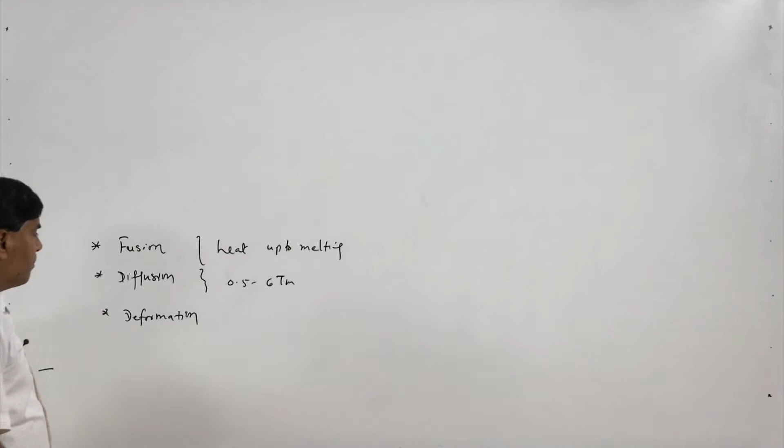So we know that for fusion we have to heat up to melting point, while the diffusion takes place in the range of 0.5 to 0.6 times the melting point in Kelvin. While the deformation based approach is where either heating is limited or it is very negligible.

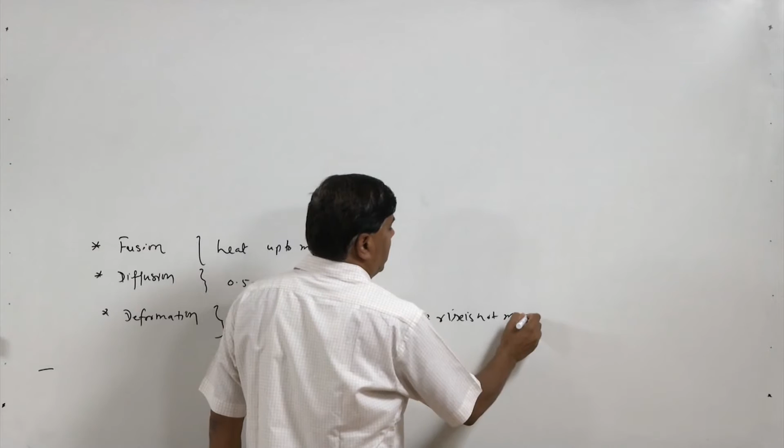So the heat is limited and temperature rise mostly is not much, but in some cases like friction stir welding and friction welding of steels, the temperature can go as high as 700, 800, even 1000 degrees centigrade. Under those conditions we may require protection to avoid the interaction of the metal with the atmospheric gases.

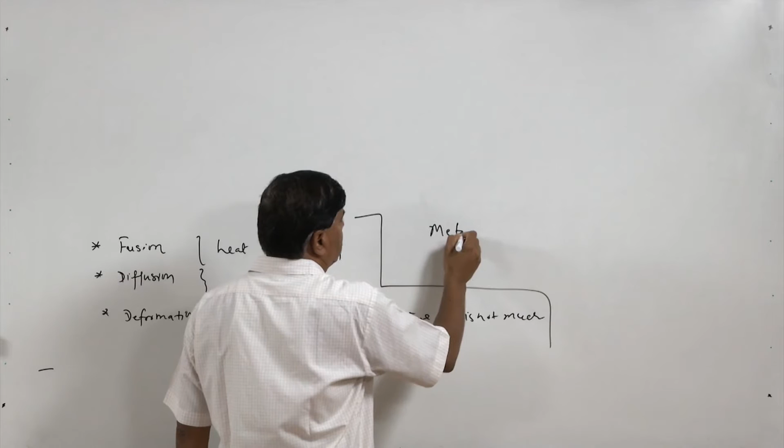We know that in all these cases the metals, when they are heated, all metals show affinity with the atmospheric gases. These gases are like nitrogen, hydrogen and oxygen. So increased activity and affinity of the metals at high temperature becomes problematic.

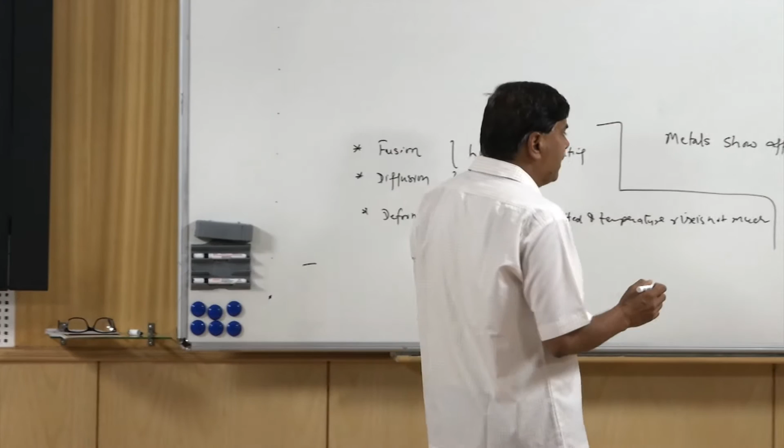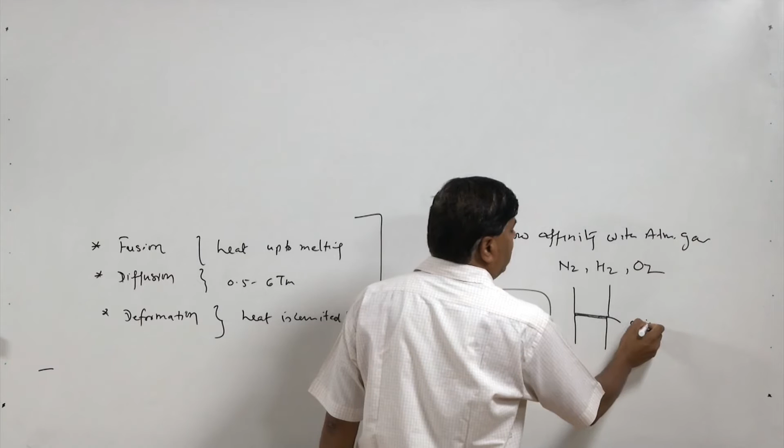Especially when fusion is achieved for development of the joint or diffusion is required across the interface of the components to be joined, because formation of any layer at the interacting surfaces, say in case of diffusion, if any layer of oxides or nitrides is formed, then it will hinder the diffusion across the interface and act as a barrier for development of the joint. So it is not good, we need to protect the joining process during diffusion by using either inert gases or vacuum.

And in case of deformation, normally if the temperature rise is not much, then separate protection of the metal from atmospheric gases is not required. But if the temperature rise is too much and the metal is sensitive, then of course we require protection from the atmospheric gases even in deformation based joining approaches.

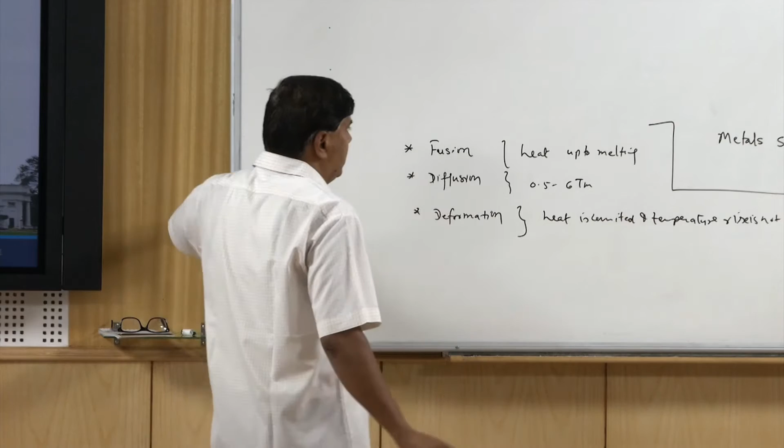So now we will focus mainly on two aspects here, diffusion and fusion, because the problem of interactions of atmospheric gases with the solid state process is not that much, unless very specialized metal systems are welded, like titanium alloys, which may require protection.

So here when we talk about fusion, because of the change in state from solid to liquid, these gases from atmosphere like nitrogen, oxygen and hydrogen are the main problematic gases as far as fusion welding is concerned. And these gases, whenever the components to be joined are brought to the molten state, interact with the molten metal in two ways.

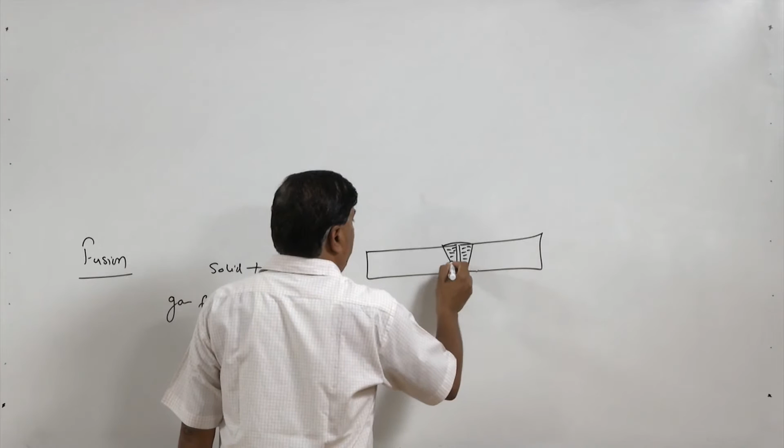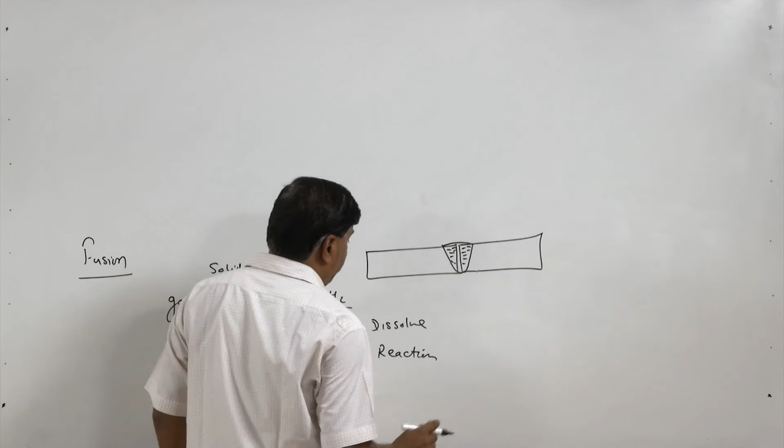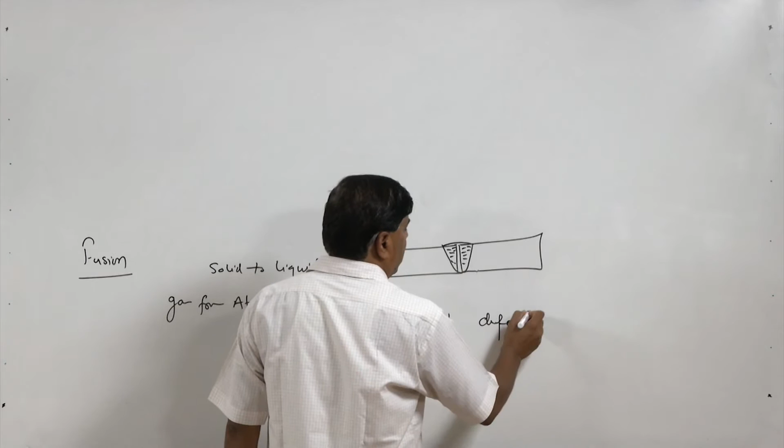One, either these gases will get dissolved because of the high solubility at elevated temperature in the molten state, or they will react. So according to the way by which they interact with the molten metal, they will result in defects or discontinuities, which may lead to rejection of the weld joints when the discontinuities are beyond the acceptable limits.

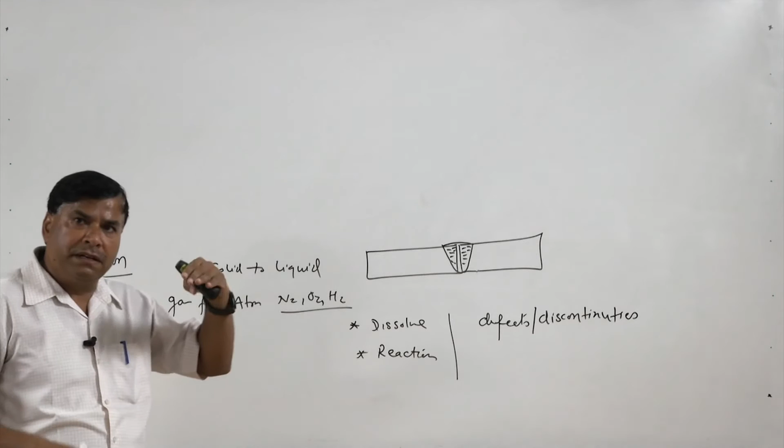So when the gases dissolve in larger quantity in the molten state, and during solidification if they do not get enough time, it results in the development of porosity.

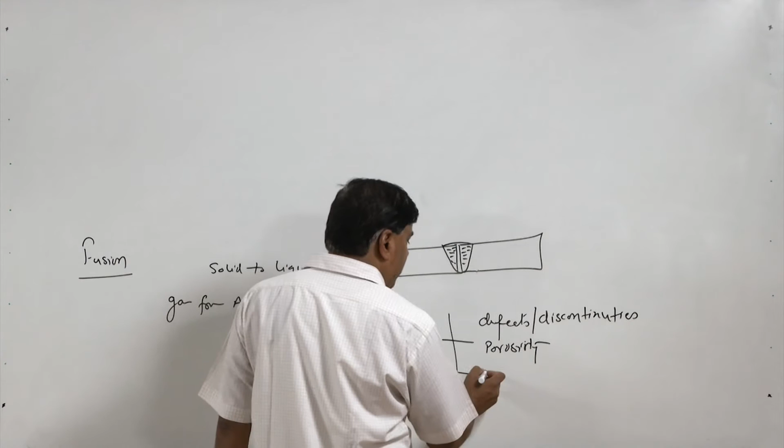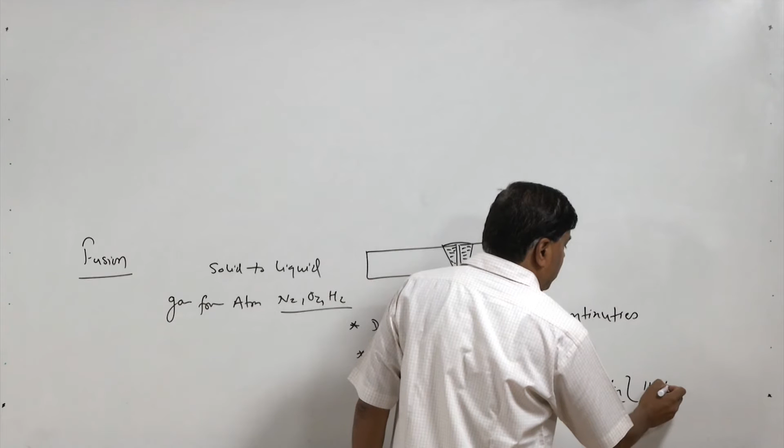And when the gases interact with the molten metal at high temperature, they will result in oxides, nitrides, hydrides. So these things, if they do not float over the surface, if they are not separated, then they will be present in the weld as inclusions.

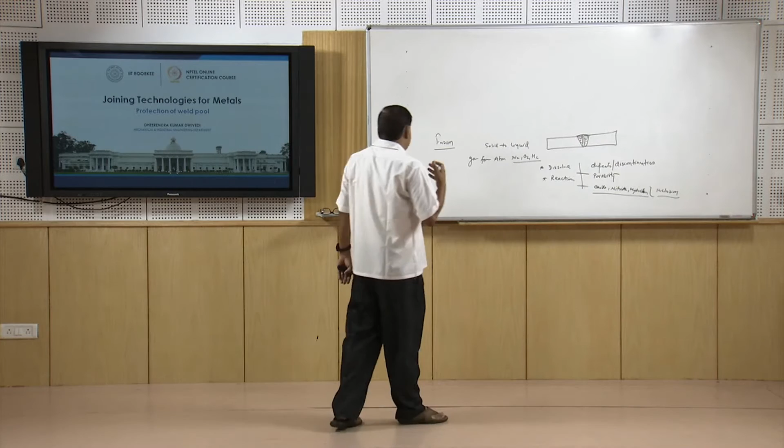So in both cases, the presence of porosities or inclusions in the weld will deteriorate the mechanical performance as well as other performance expected during service, like corrosion or ability to carry fatigue loads or tensile loads. Therefore, it is required that during fusion welding, the weld metal is protected using suitable approaches from the atmospheric gases.

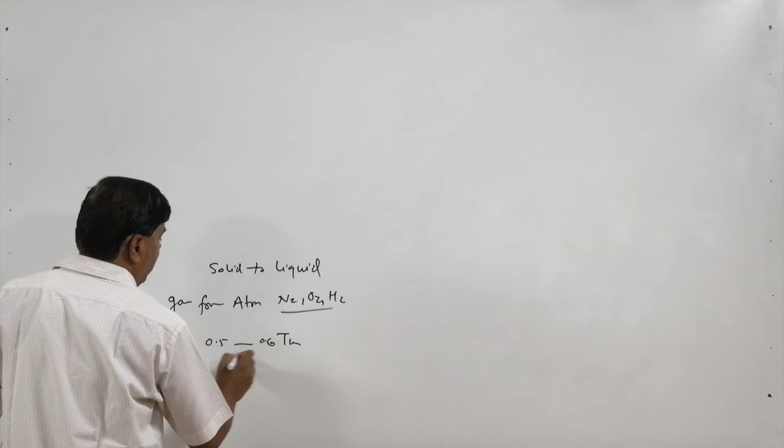And now another thing is about the diffusion. We know that if diffusion has to take place in the 0.5 to 0.6 times the melting point range, it is very much possible, if carried out in environmental or ambient conditions, this kind of heating will result in the formation of oxides and nitrides at the interacting surfaces.

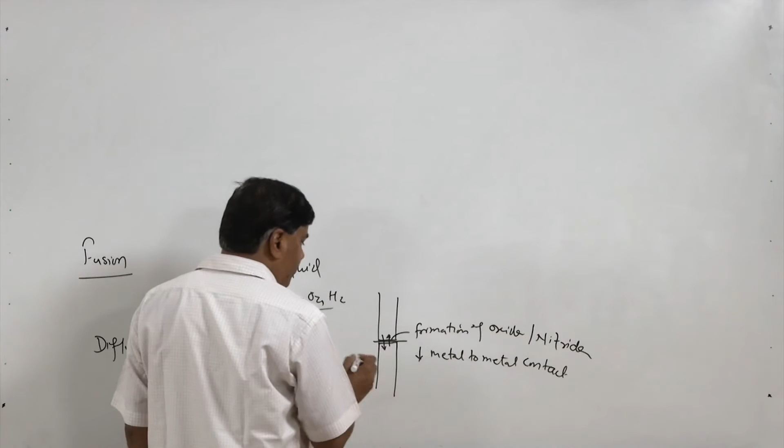So formation of these oxides and nitrides at the interface will reduce the metal to metal contact, and this hindrance will reduce the diffusion of atoms across the interface, which normally takes place for development of diffusion bonds. This is the prerequisite that across the interface diffusion has to take place, then only the bond will be developed.

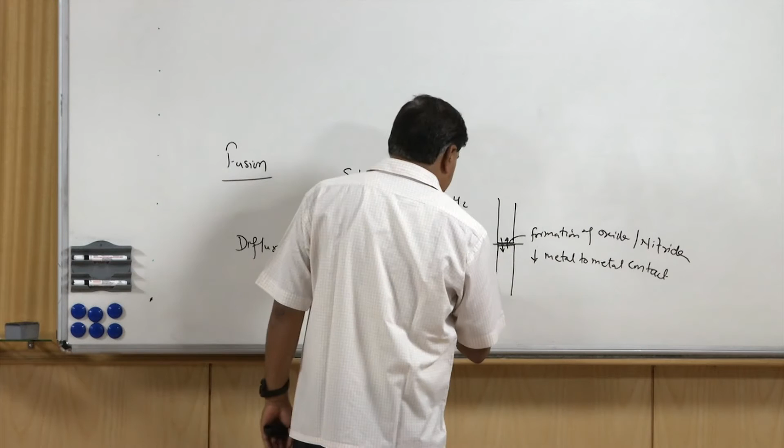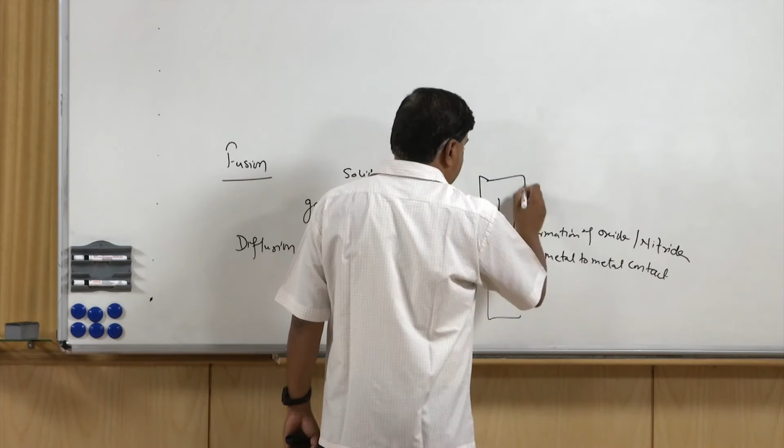The formation of oxides and nitrides due to heating at higher temperature is undesirable, and that is why it is necessary that the entire system for the diffusion bonding process must be protected. This protection is normally provided using two approaches. The most common one is the application of vacuum, ranging from 10 to the power minus 3 to 10 to the power minus 5 torr, which is very commonly used for the diffusion bonding process.

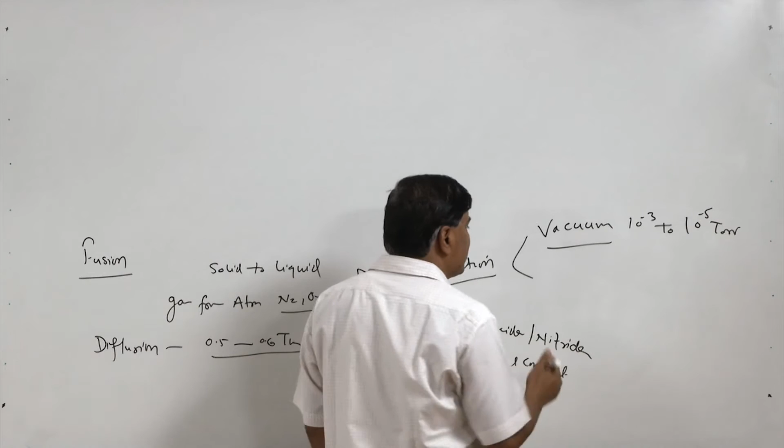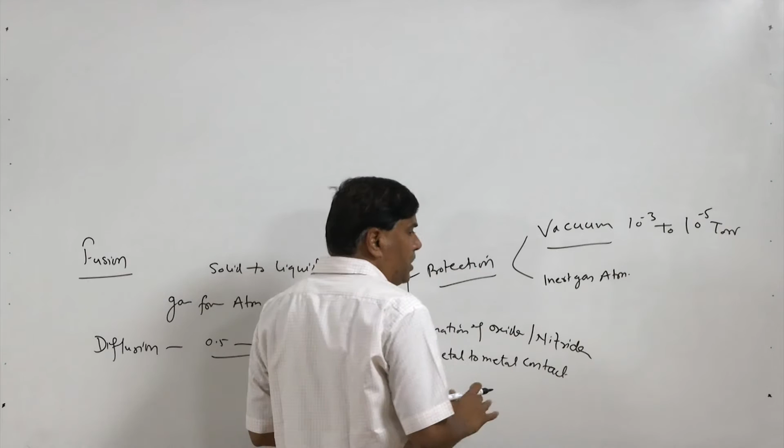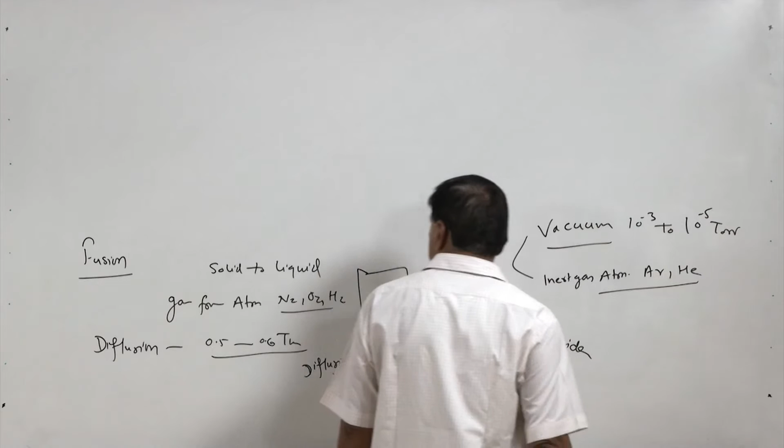On the other hand, if the metal is not that sensitive, then an inert gas atmosphere can also be created to avoid interactions of the faying surfaces during diffusion bonding, like formation of oxides and nitrides. For this purpose, argon and helium are the most commonly used gases to protect the faying surfaces from atmospheric interactions in diffusion bonding.

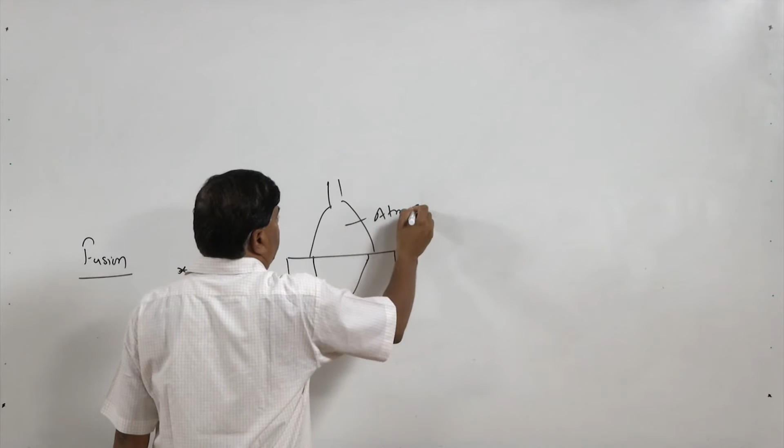Now we will see, if protection is not provided, what it leads to in respect of specific gases. If atmospheric gases are present in the fusion zone, or in the arc environment or whatever heat source is being used, these atmospheric gases get mixed up with the molten metal.

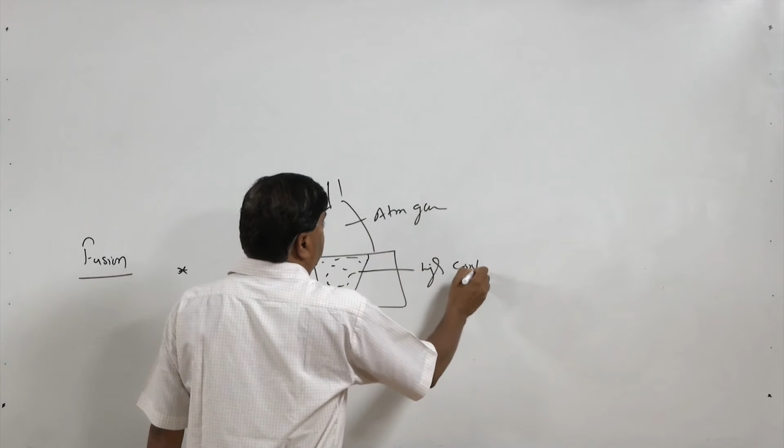High cooling rate of the molten metal sometimes causes entrapment of these gases in the weld. Such entrapment will appear in the form of big gas pockets. Another problem encountered is porosity, due to the difference in solubility of the gases in the liquid and solid state.

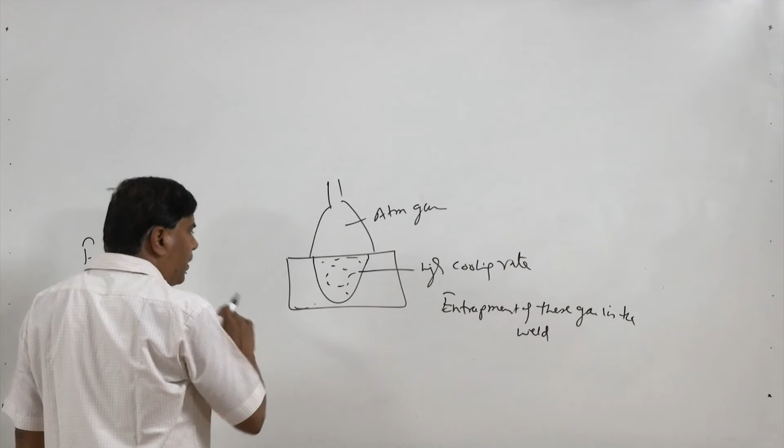When the gas is dissolved with the molten metal, or the gas is coming from the fusion of the metal in solid state, the gases which were already dissolved in the base metal - like the base metal already having a lot of oxygen and nitrogen content - after fusion these gases will automatically be present in the weld metal also. These gases must be taken care of, otherwise they can react in two ways.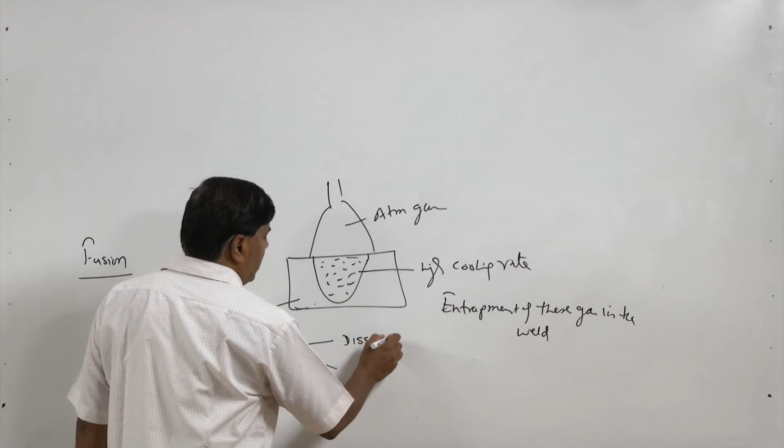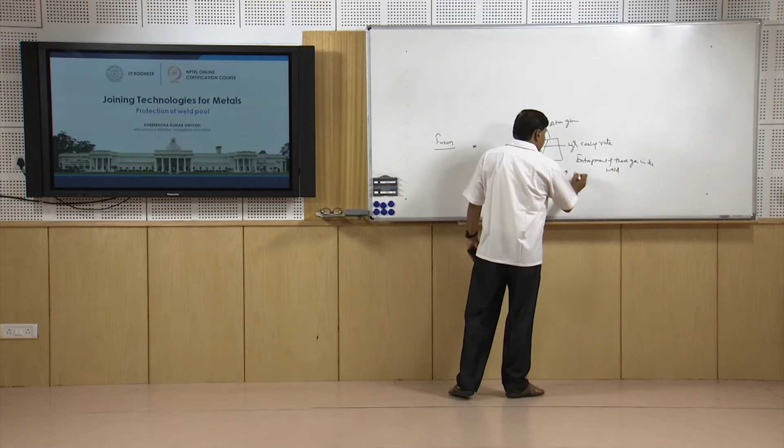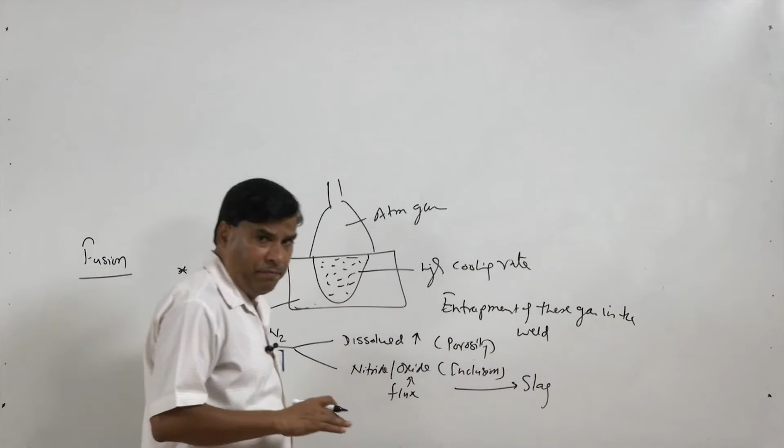The dissolved gases will tend to come out. If they are not able to come out up to the surface of the pool, then they will be present as porosity. Or if they react with the metal, they will form oxides and nitrides, which will be there as inclusions. So we need to take care of these oxides and nitrides using suitable fluxes. Fluxes react with the oxides and nitrides to form slag, and slag is designed to be lighter, so it floats over the surface of the weld pool and gets separated.

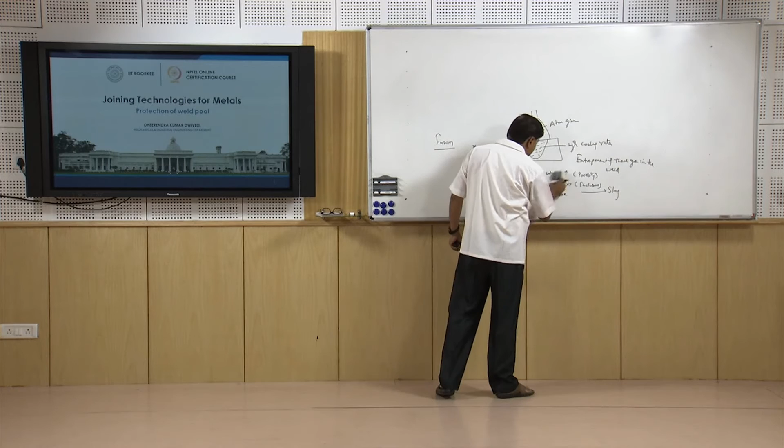Now we will see how specifically these gases affect the weld joint whenever present in larger quantity. Before going into that, from the welding point of view, we will try to see how the gaseous content in the weld metal is affected by the processes being used. We will see what approaches are available for protection of the weld. Basically, three approaches are normally used.

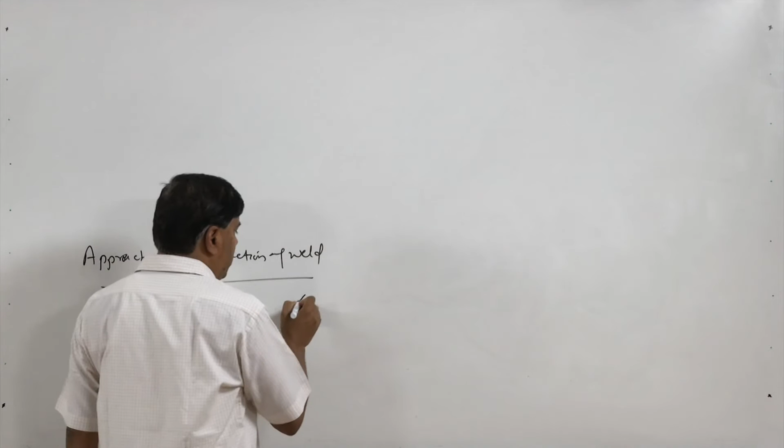One is forming a cover or shield of inert or inactive gases as per the metal. This kind of approach is used in processes like TIG welding, tungsten inert gas welding, and metal inert gas welding, like plasma arc welding, and shielded metal arc welding.

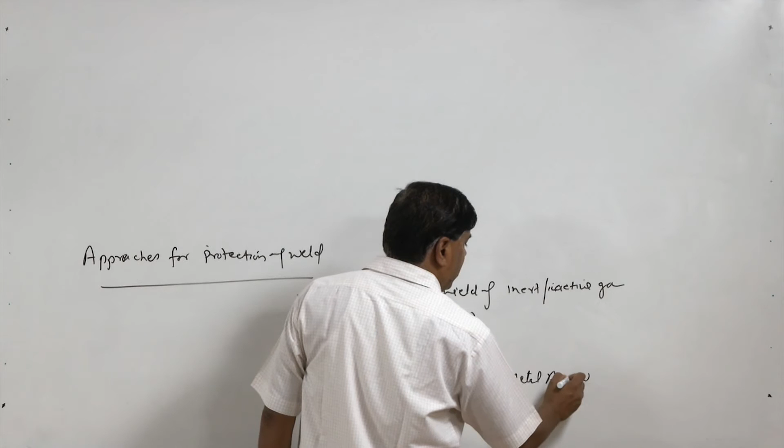These are the different processes - TIG invariably uses inert gas, while MIG can use both inert or inactive gases like carbon dioxide. Plasma also normally uses inert gases like argon and helium, and shielded metal arc welding uses flux coatings which produce CO2 and CO to protect the weld from atmospheric gases.

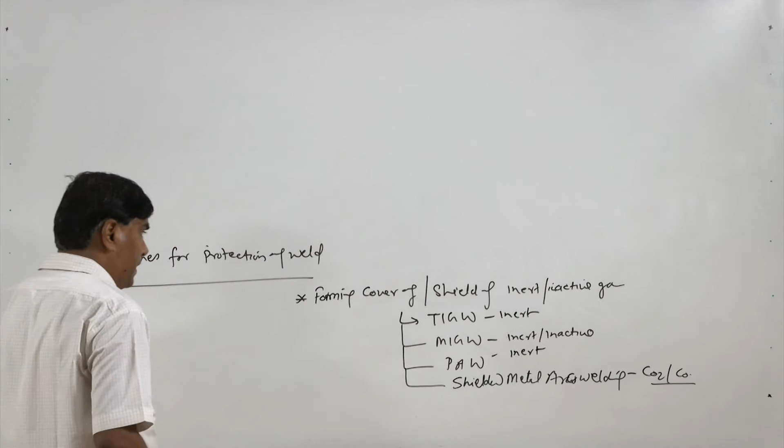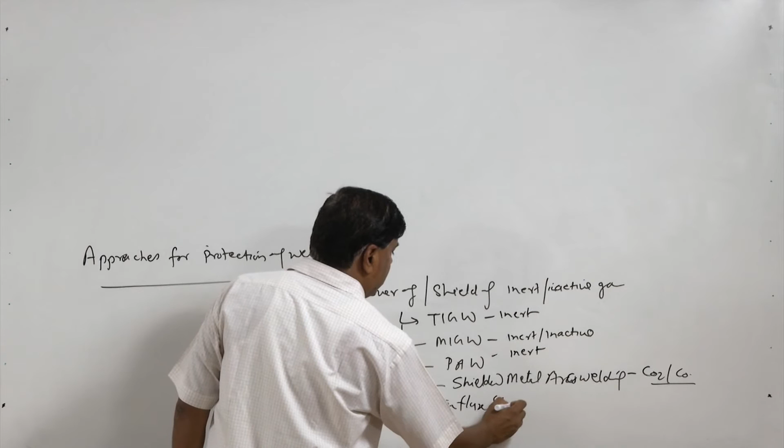Another approach is forming a cover of molten flux or slag. This is used in submerged arc welding, where the arc is completely covered with granular flux which is brought to the molten state in course of welding. So its interaction with the weld pool from atmospheric gases is prevented.

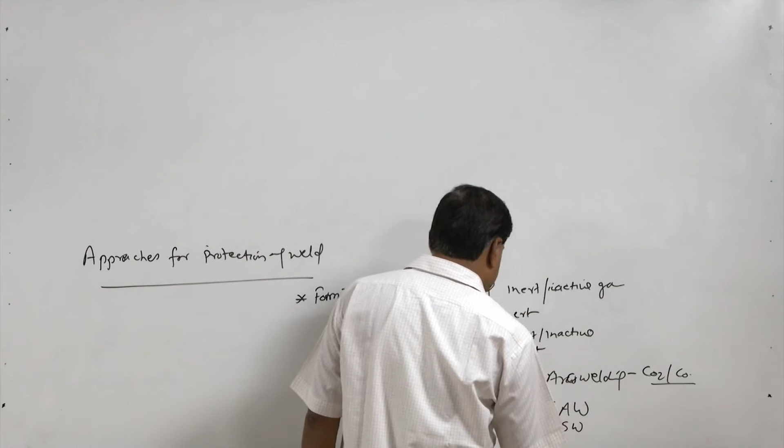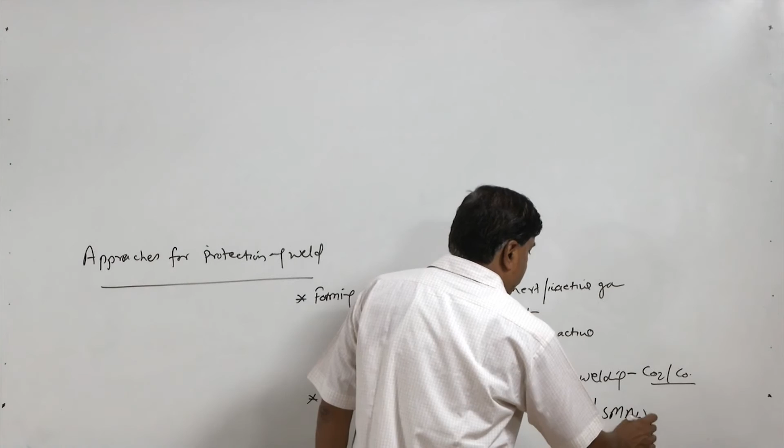The second is electroslag welding. In electroslag welding also, the molten flux and molten slag completely cover the molten metal, thereby providing protection to the weld pool. This principle is also used to some extent in shielded metal arc welding, because in shielded metal arc welding the fluxes react with impurities to form slag, and slag floats over the surface of the pool, separating the weld metal from atmospheric gases.

So it uses both forming a shield of inactive gases like CO, CO2, and covering the molten metal with molten slag in the shielded metal arc welding process. Both approaches are used in shielded metal arc welding. Now we will see the kind of vacuum used.

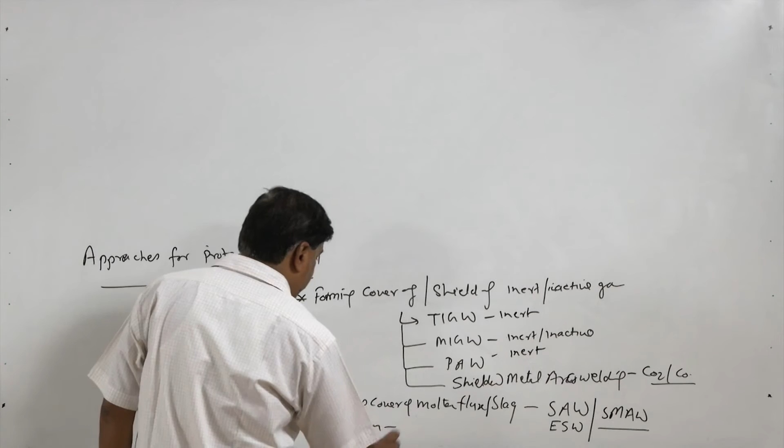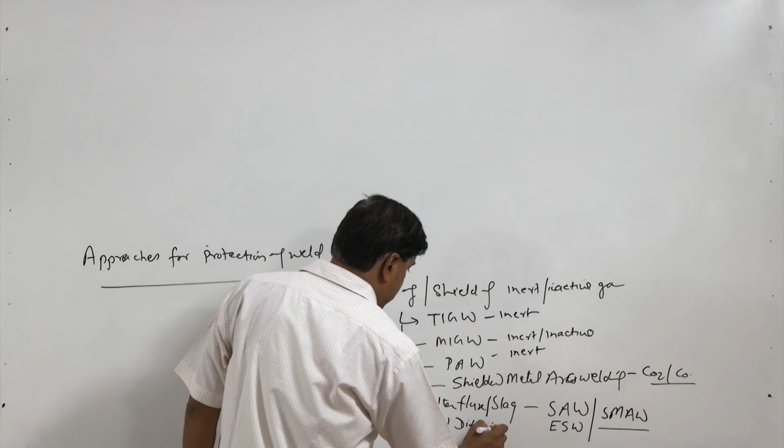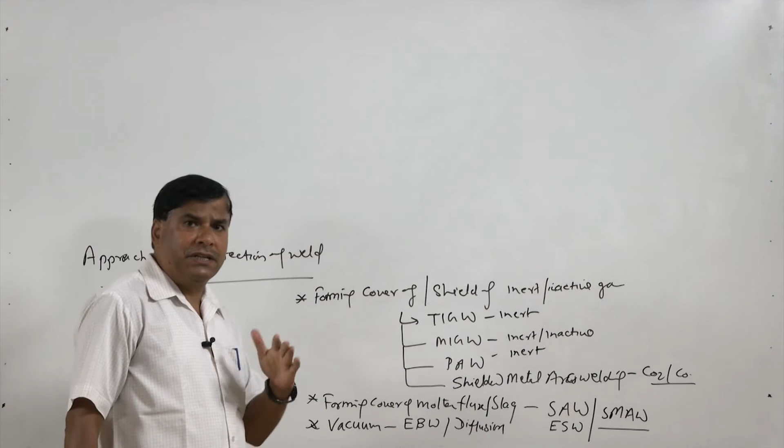Vacuum use for protection of the weld pool is also effectively used for protecting the weld joint, and this is used in case of electron beam welding. As I said, diffusion bonding also uses vacuum to avoid interactions of the atmospheric gases with the mating surfaces. Since the approaches are different and welding conditions differ while actually welding, the kind of protection available to the weld metal becomes different, and accordingly the quality of the weld is also found to be different.

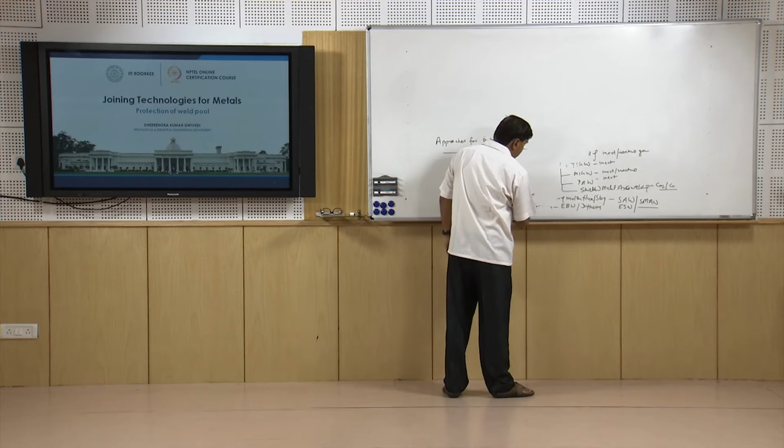That is what we will see generally observed: the gaseous content in the weld metal produced using the different welding processes. So this is what we will try to see from this diagram, which will highlight the kind of cleanliness with which the welds are produced by the different welding processes.

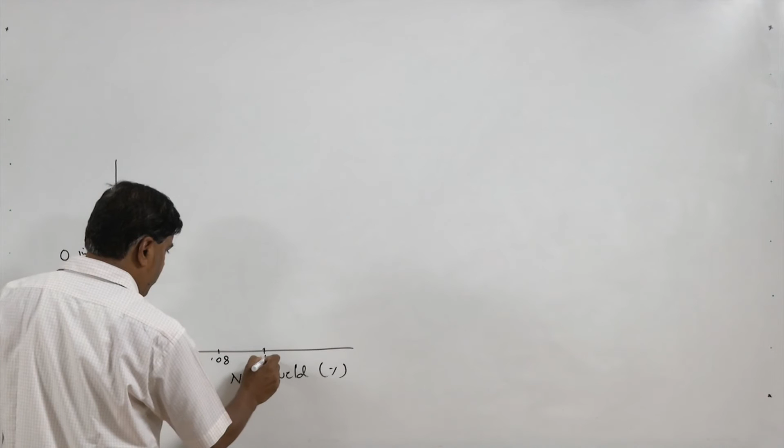On the x axis we will mention the percentage of nitrogen in the weld, and on the y axis we will mention the percentage of oxygen in the weld, in terms of percentage. So here, like say 0.04, 0.08, 0.12, 0.16 like this, and here 0.05, 0.1, 0.15, and 0.2.

So here we will see the very narrow band of oxygen and nitrogen. The weld produced using process A, like say TIG welding, which invariably uses inert gases, produces the cleanest weld, and thereafter we will have the MIG welding, MIG or GMAW.

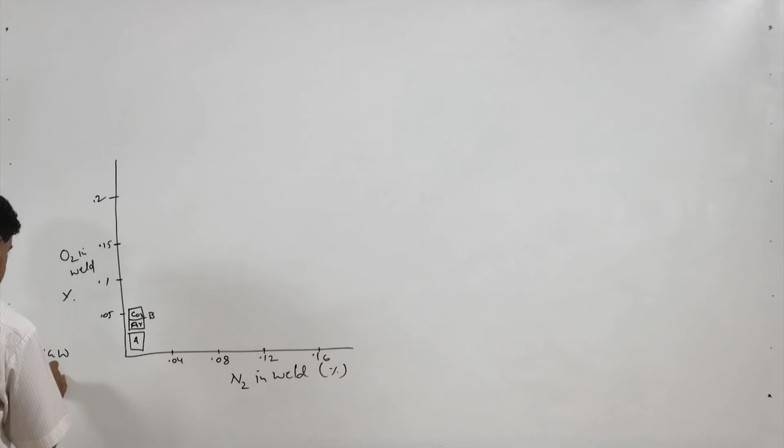It can use CO2 or argon; if argon is used, this is the lower band, and if CO2 is used, the higher band. So this second one, the joint made using process B, GMAW gas metal arc welding, using CO2 or argon, CO2 results in somewhat higher percentage of oxygen in the weld as compared to argon. From the cleanliness point of view, the cleanest weld is produced by GTAW and then GMAW. Then we will see submerged arc welding.

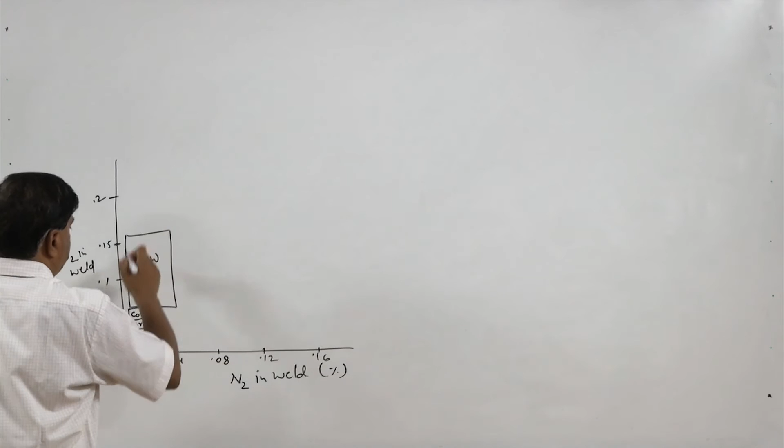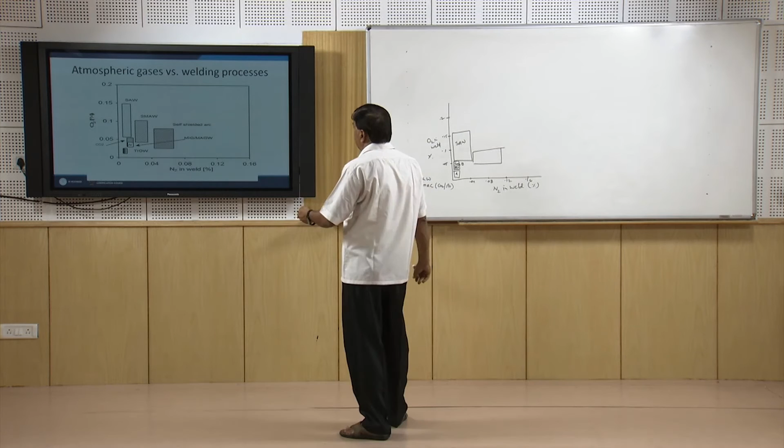Submerged arc welding process offers a much higher band, a much larger concentration of oxygen in the weld, and thereafter we have shielded metal arc welding process. This is what we can see from this diagram also: submerged arc welding, and this is for shielded metal arc welding process, which offers a greater percentage of oxygen as well as nitrogen.

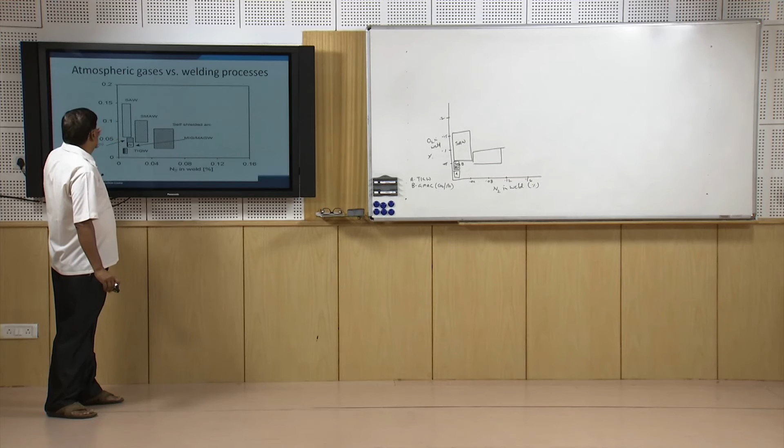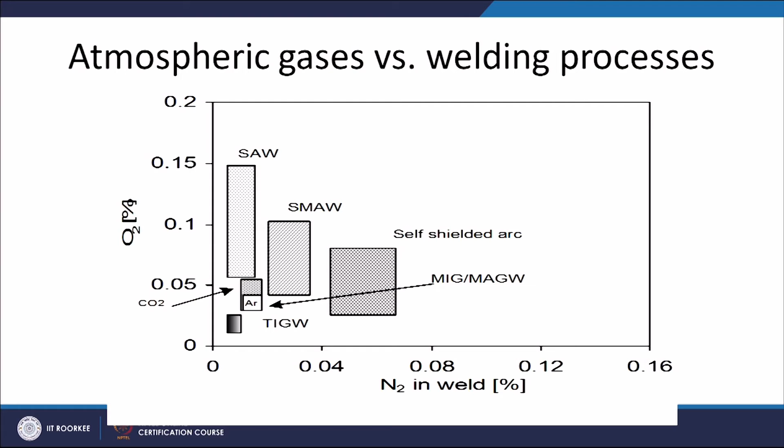Here we can see the cleanest weld is produced with GTAW, thereafter GMAW using argon or CO2, and then submerged arc welding, with more oxygen and more nitrogen in the weld produced using shielded metal arc welding, and thereafter self shielded arc welding processes like flux cored arc welding, which offer much higher concentration of oxygen as well as nitrogen. So this is what we can correct here a little bit.

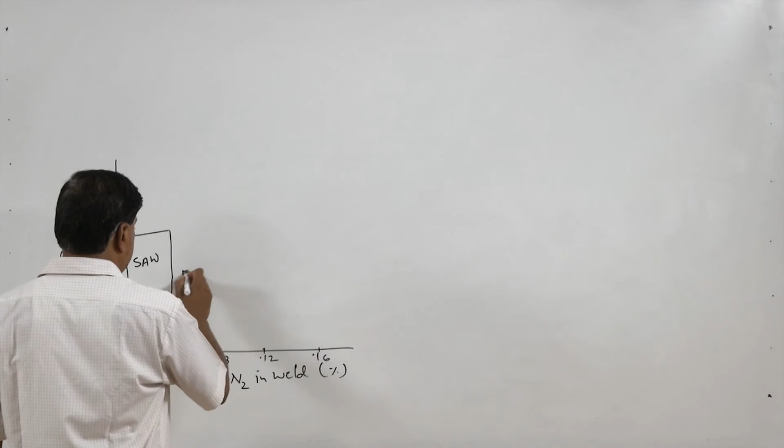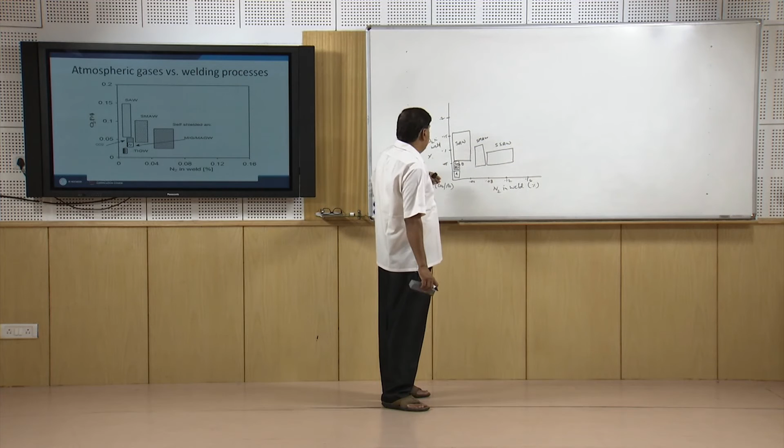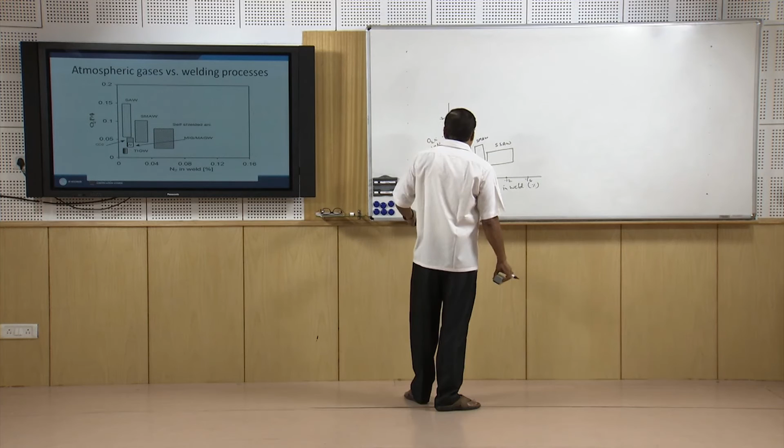So you can see this is for SMAW, and here we have self shielded arc welding like flux cored arc welding, which offer much higher concentration of nitrogen in the weld. Since the protection approaches used in the different welding processes are different, the kind of cleanliness, or the nitrogen and oxygen content in the weld metal, is also found to be different, and accordingly we can expect the percentage of porosity or inclusions in the weld.

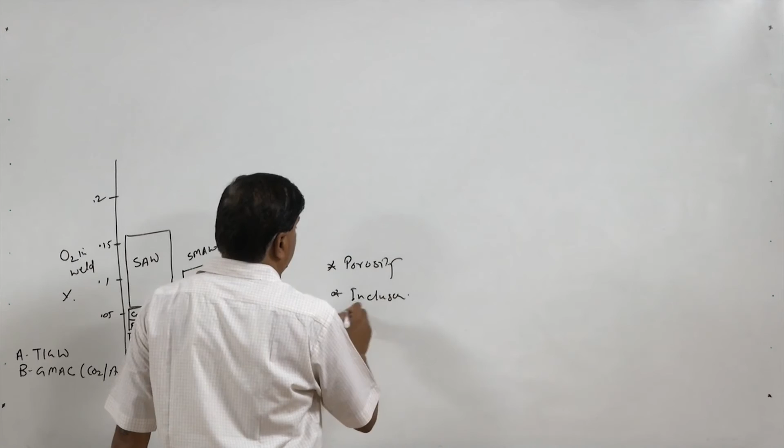It is very clear that greater the percentage of oxygen and nitrogen in the weld, greater will be the porosity and inclusions. To see the effect of specific gases like oxygen and nitrogen on the weld, we will see two diagrams, one for oxygen and another for nitrogen.

Increasing concentration of nitrogen in the weld in general increases the strength, yield strength and ultimate tensile strength, but it happens at the cost of ductility and toughness. So ductility and toughness in general decrease with the increase in nitrogen concentration in the weld, while yield strength and ultimate strength increase.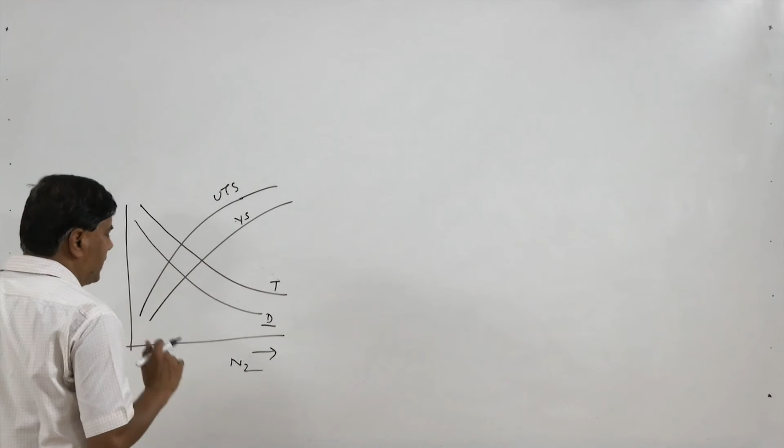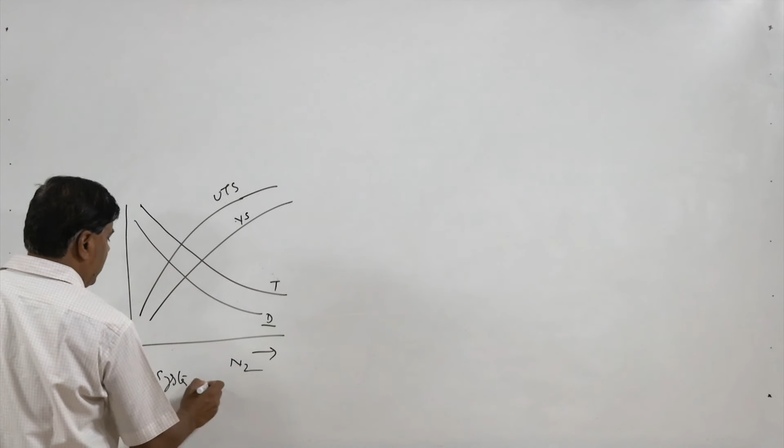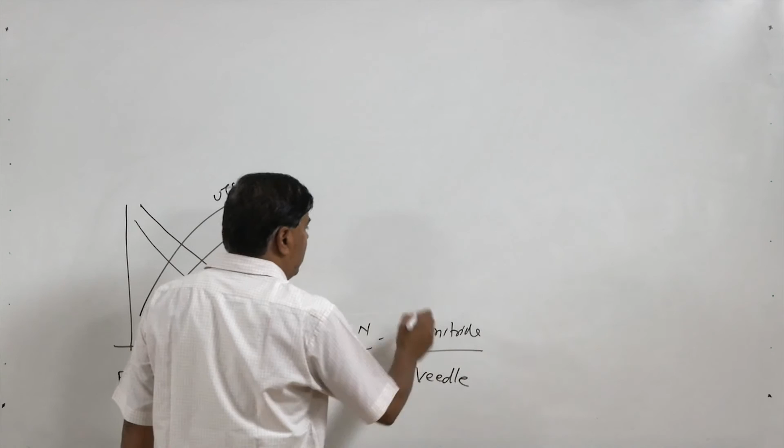This is true for iron carbon systems, especially in case of carbon steels, and this variation is attributed to the interaction between iron and nitrogen leading to the formation of iron nitride, and this iron nitride appears in the form of needles. So in the weld you will see very fine needles of iron nitride, and these needles are very hard and brittle.

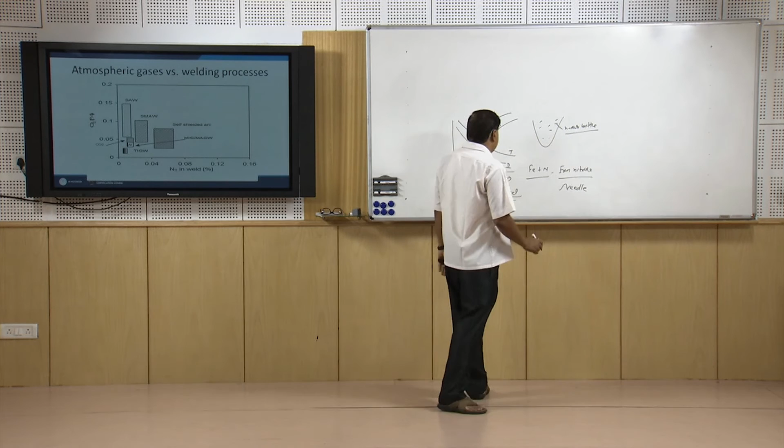So, the presence of hard and brittle needles in the matrix of the iron provides very good strength, but the sharp edged needles also facilitate the easy nucleation and growth of cracks, and that is why the ductility and toughness in general reduce with the increase in the nitrogen content.

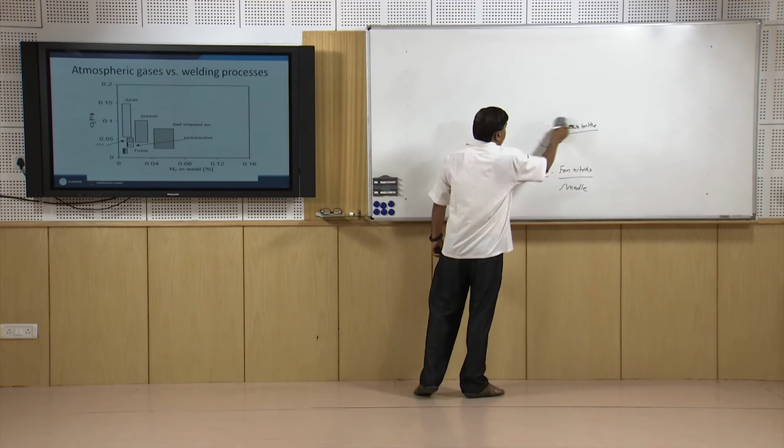So, this is the effect of presence of the nitrogen up to a limit is good from the strength point of view, but it compromises with the ductility and toughness of the weld joint.

On the other hand, if we see the effect of oxygen and the mechanical properties on the y axis, then increasing oxygen content in general decreases the strength, ductility and the toughness.

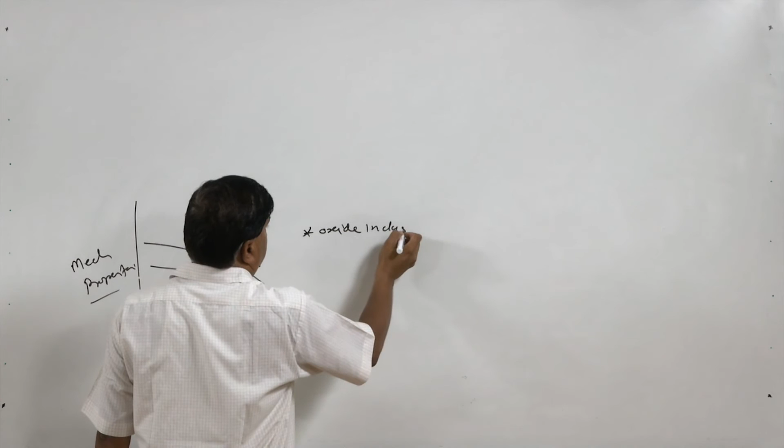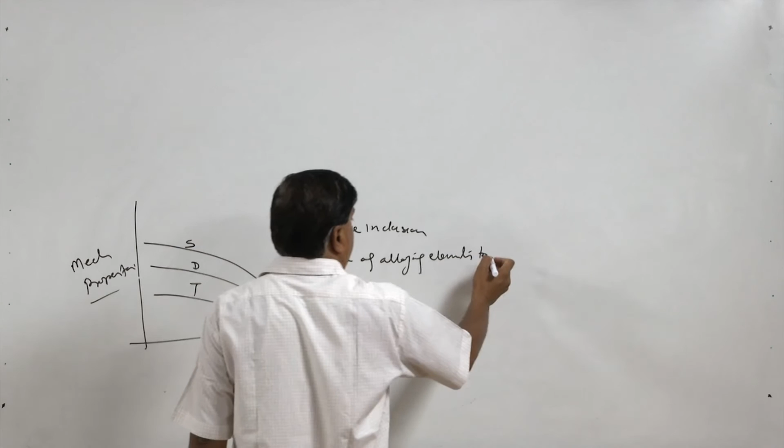So, strength, ductility and toughness all decrease with the addition of the oxygen content, and this is attributed to the formation of the oxide inclusions, and the loss of alloying element to the oxygen in form of oxides.

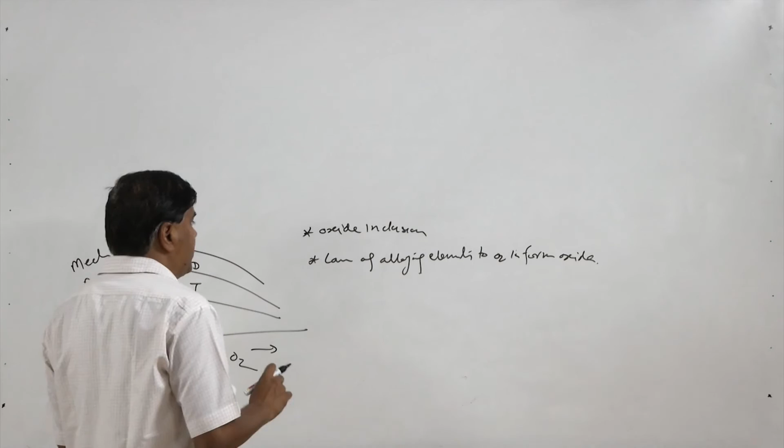This is what can also be seen from the effect of oxygen on the elemental efficiency. So, if the alloying elements are lost or the oxide inclusions are present, or more oxygen is leading to the loss of the hardenability due to the loss of alloying elements, then they will degrade the properties of the steel.

Inclusions effectively reduce the load resisting cross sectional area in the weld joint, and that is why in general all the properties of the steels mainly decrease, while in some of the cases increasing presence of the oxygen in the weld metal

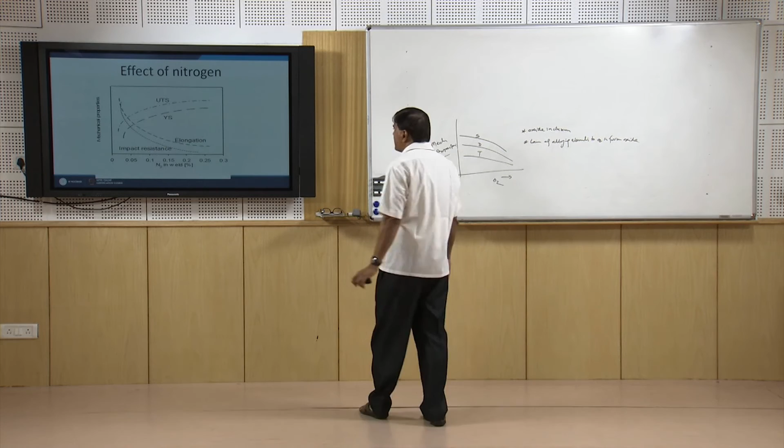promotes the acicular ferrite, which in turn promotes the toughness of the weld joints. So, in some of the cases only acicular ferrite is promoted with the presence of oxygen, and that in turn improves the toughness.

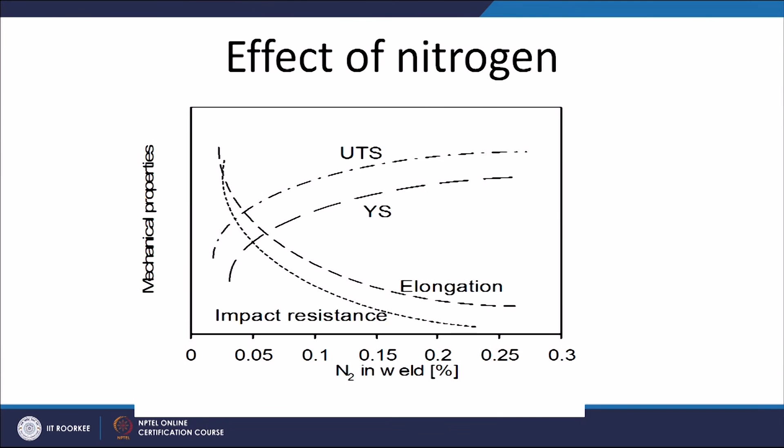So, now we will see this diagram shows the effect of the nitrogen on the mechanical properties, and this shows the effect of the oxygen on the mechanical properties of the weld joint, especially of the carbon steels, where loss of the ultimate strength and the yield strength, impact resistance and elongation, everything takes place.

So, now we will see how the element transfer efficiency decreases with the presence of oxygen. We will see that increasing concentration of the oxygen decreases the manganese and silicon content and the chromium content in the weld metal. So, once the things present in the filler are not being transferred to the weld pool, it will lead to their loss.

So, elements are getting lost in the process of transfer, and this efficiency decreases.

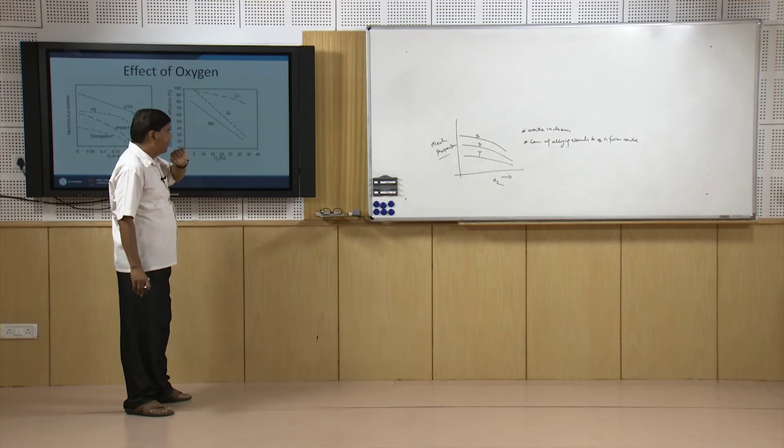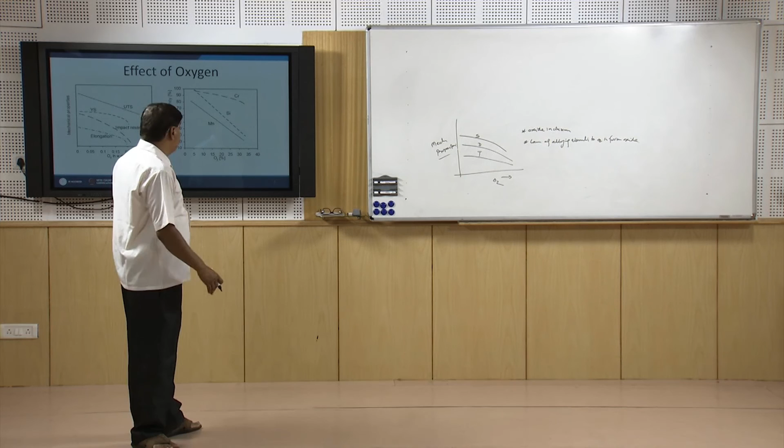For example, if the filler had 2% of a particular element like silicon, then for a particular concentration of oxygen, say 25% of the oxygen, it will lead to 50% element transfer efficiency, meaning the weld will actually have just 1% of the silicon. So, out of the given amount how much is actually being transferred, that determines the element transfer efficiency, and that is adversely affected with the presence of oxygen, and that is why it is important to protect the weld.

So, this is what I had explained, that when the gases are present in the arc environment, they interact with the molten metal, and in the molten state the gases dissolve in larger quantity as compared to that in the solid state. Like this is the example of the dissolution of hydrogen in iron.

Increase in temperature changes the crystal structure, initially it is alpha, then it changes to gamma and then delta. Alpha has the BCC crystal structure, gamma has FCC, and delta again has the BCC crystal structure. So, because of the changing crystal structures, increased space is available for occupying the hydrogen atoms, there is an increase in solubility, and there is a sudden increase in the solubility

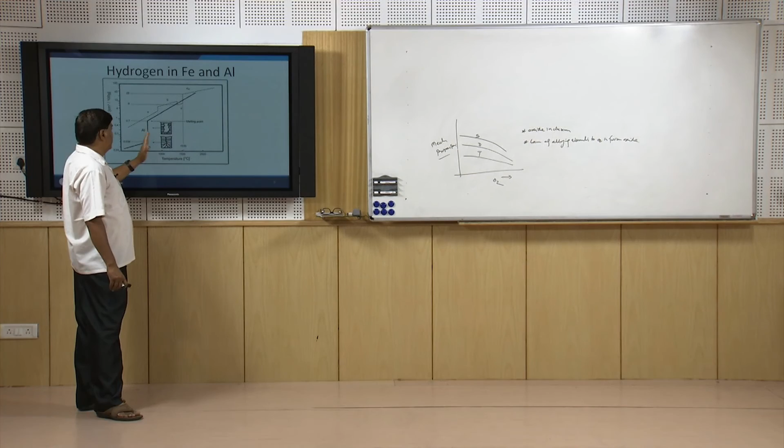of the hydrogen when the transformation from the solid to the liquid state takes place, and the same thing happens in case of aluminum also. As soon as the temperature increases above 660 degrees centigrade, there is a sudden jump in the solubility of hydrogen in aluminum, and thereafter it increases.

So, the large difference in the solubility of hydrogen in liquid and solid state leads to the development of porosity in the weld joints. That is why it is important that the gases need to be eliminated from the arc environment, or we need to take care of them by using suitable approaches.